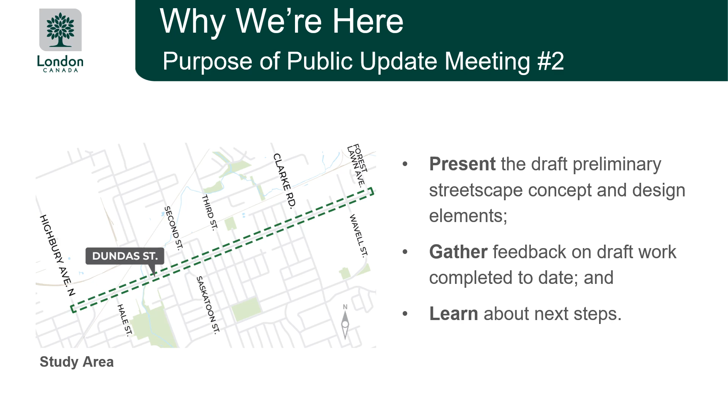Let's talk about our project timeline. We kicked off Phase 1 in August last year, with work concluding in November 2023. Right now, we're in Phase 2, which focuses on developing a draft preliminary concept and supporting design elements. The third public update meeting is set for March, where we'll present the final Streetscape Master Plan. After that, we'll work on finalizing the master plan and design guidelines, aiming to conclude by April of 2024.

On November 7th, 2023, the first public update meeting for this project took place to introduce the project and provide an opportunity to gather valuable feedback from the community, both in person and through an online questionnaire.

Feedback was gathered from one-on-one discussions, surveys, and interactive engagement activities. To gather your feedback, we organized 3 engagement activities around the room. Public input was collected at the 3 activity stations that were structured around the following themes: preliminary guiding principles, vibrant and green streetscape, and safe mobility and connectivity.

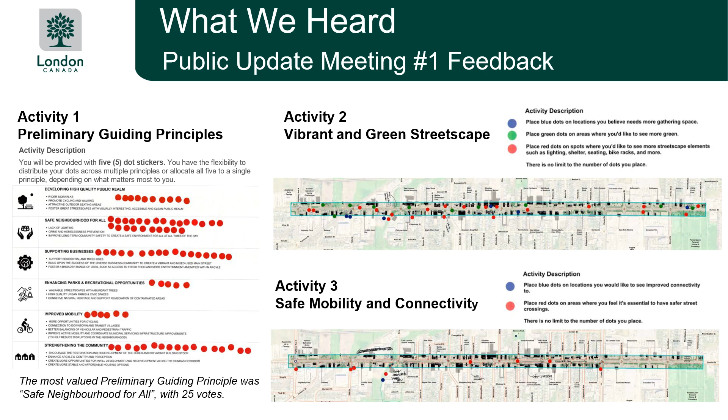Key themes that were gathered from the public's input included safety, more lighting, greening, maintenance, more pedestrian-friendly, and more incentives for businesses, to name a few.

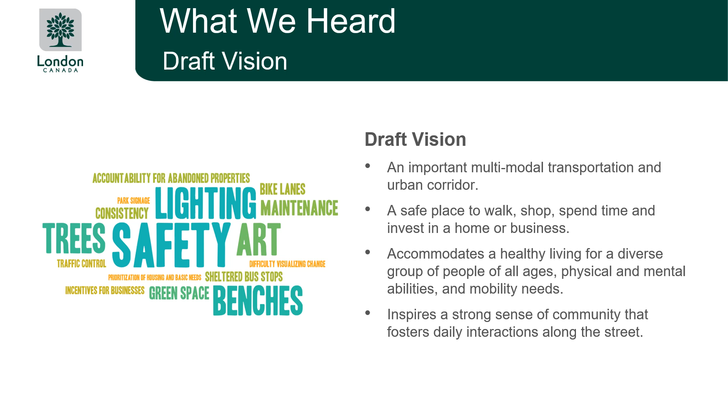These key themes were integrated into the draft vision, as shown here. This vision for the Streetscape Master Plan will guide future development within the Dundas Street corridor in the Argyle core area.

Guiding principles are the core elements that define the concepts and strategies for achieving the vision for the Streetscape Master Plan. These principles were developed based on feedback from the public consultation process and research on best practices. These principles include improving mobility, improving pedestrian realm and safety, strengthening the Argyle core community, promoting economic vitality, and improving green connections.

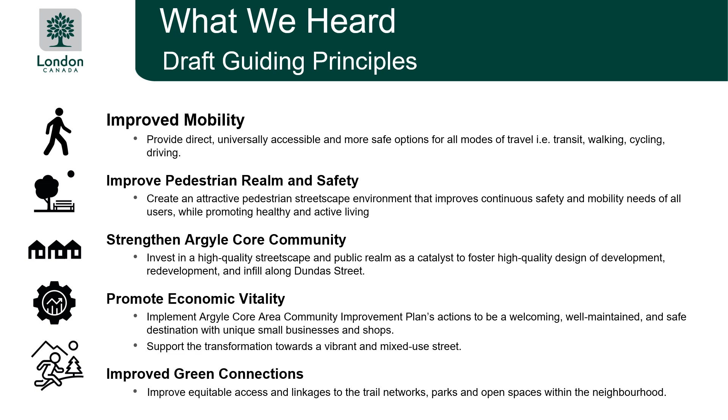When we're planning how things should function and feel in this area, we're being careful to understand the broader context and build upon what's already here. We want to make sure any changes fit well with the surroundings. And as we think about making improvements along Dundas Street, it is important to look at the short, medium, and long-term solutions reflecting the needs of the neighborhood.

As we move forward, we are gaining a clear understanding of how the streetscape operates and identifying opportunities for improvement. By understanding the broader context within the area, considering factors like zoning, setbacks, road right-of-way widths, natural heritage features, current and planned active transportation routes, traffic flow, and utilities, we can develop the streetscape design so that the public realm is a place where people will enjoy walking in, feeling safe, invited, and with enhancements that beautify the area.

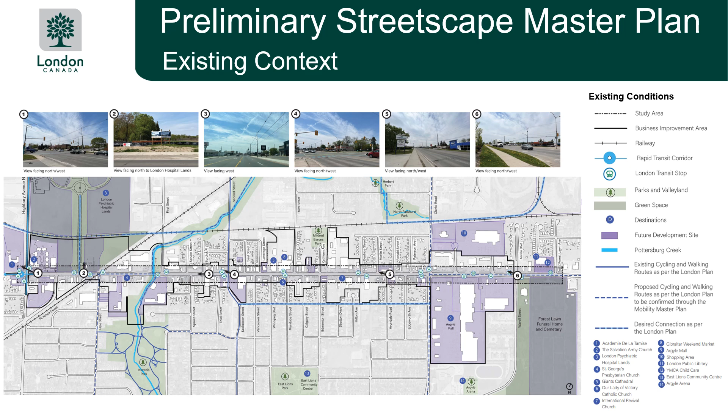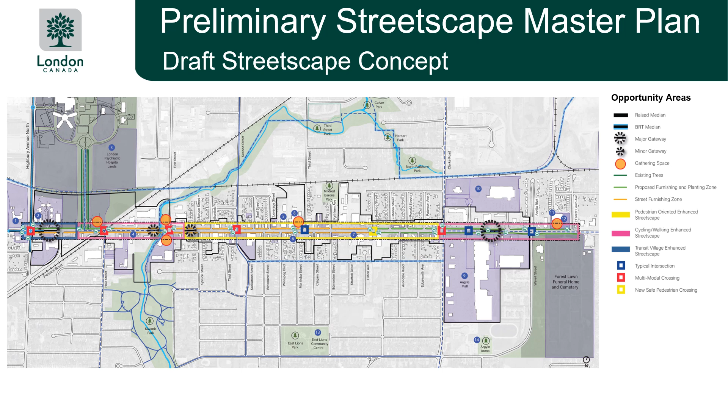These streetscape typologies and opportunity areas are illustrated in more detail in the following slides. First, we'll look at the pedestrian-oriented enhanced streetscape, which is generally applicable to the area east of the bridge at Pottersburg Creek to Clarke Road.

Concept options are illustrated in the following cross-sections A, B, and C. This corridor is generally characterized with a narrower right-of-way with zoning setbacks of around 0 meters, which means there are some limitations in implementing beautification improvements to the pedestrian space.

In this segment, our focus is on providing more safe movement of pedestrians along the streetscape. There are potential opportunities to provide beautification features in the proposed mid-block medians and where the right-of-way width increases east of Beatrice Street.

Shown here in cross-section A, the key elements of this scenario include maintaining the existing 5-lane cross-section, which includes the center 2-way left turn lane. The pedestrian realm space ranges between 2.5 and 3.5 meters, which can be characterized with a 1.8 to 2 meter wide concrete sidewalk, a 1.5 meter wide sodded boulevard or curbside furnishing zone, improved pedestrian scale lighting, and integrating standalone planters where feasible.

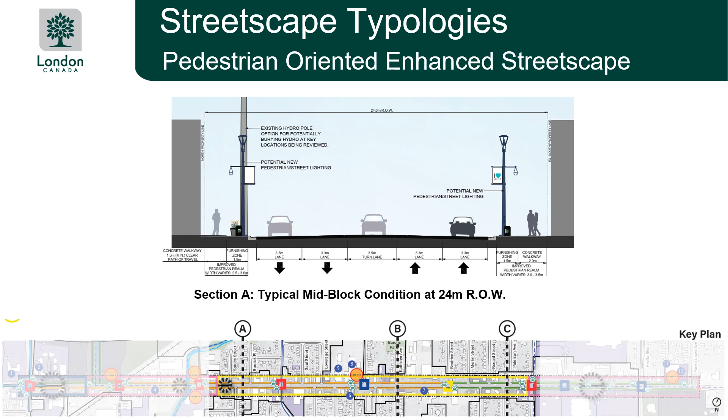The next slide, we will look at some of the advantages and disadvantages with this option of the removal of the 2-way left turn lane, which are important considerations as we further develop the Streetscape Master Plan.

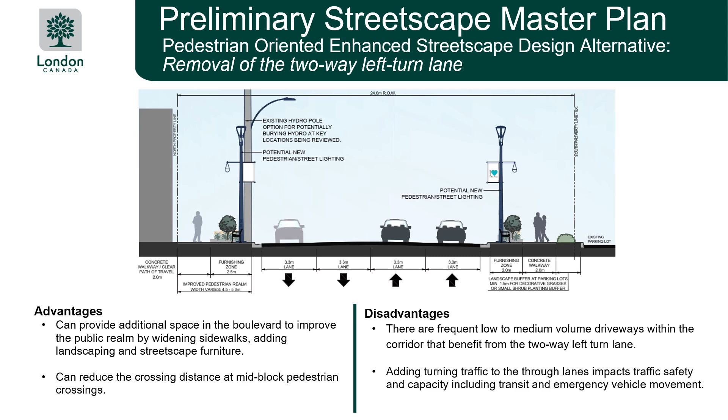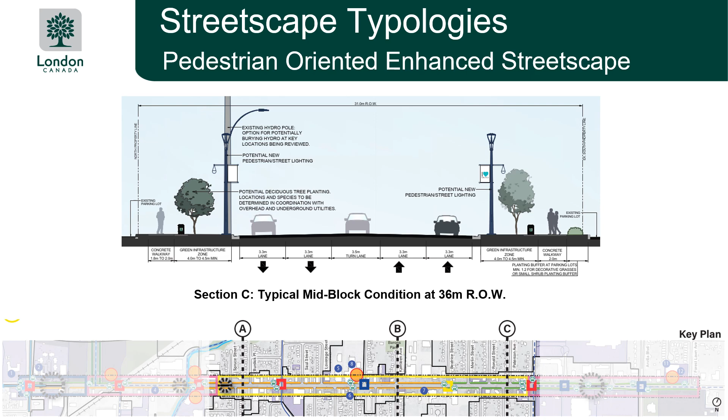The pedestrian realm on the north and south sides can be characterized with wider sidewalks and a wider green boulevard, which may include tree planting and sod, street furniture such as benches, and improved pedestrian scale lighting. Opportunities to provide a landscape buffer between the sidewalks and adjacent parking lots are also feasible in this scenario.

Next, we'll look at the Transit Village Streetscape and the Multimodal Enhanced Streetscape in the West Corridor. Concept options are illustrated in the following cross-sections D, E, F, and G for this West Corridor segment. The Transit Village Streetscape, shown here in Section D, is part of the East London Link Rapid Transit Corridor improvements. This segment also marks the entrance into the Argyle core area.

In this section, the pedestrian realm can be characterized with 2 to 2.5 meter wide sidewalks, a sodded boulevard, including streetscape furniture along the walkways such as benches, updated street lighting consistent with City of London standards, and a center raised median with an opportunity to include gateway features such as low curved planters or a unique sculptural element to mark the entrance into the Argyle core area.

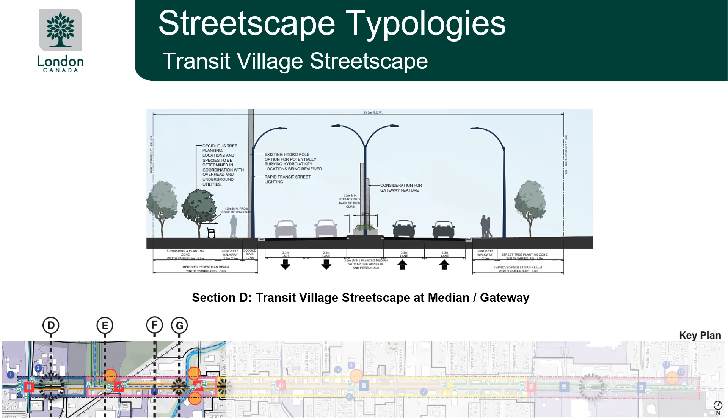Opportunities to provide new street tree planting on the south side with potential on the north side in key locations and in coordination with overhead utilities.

The multimodal enhanced streetscape options in the West Corridor are illustrated in the following cross-sections E, F, and G. This segment is characterized by the integration of the proposed cycling routes as per the London Plan, distinct placemaking elements such as gateway features, mid-block raised medians, gathering spaces or activity nodes, and improvements to the public realm where the right-of-way widths are wider.

Although there are some limitations to the segment due to a narrower right-of-way as shown in Section F, generally the key features in this segment include a separated 2-way cycle track on the south side, gateway features such as mid-block raised medians with curved planters of native grasses and perennials, wider concrete sidewalks, and wider sodded boulevards with the potential for street tree planting where space allows. Furnishing zones between the sidewalk and the roadway are also proposed in key strategic locations, which may include curbside planters, street furniture, and improved street and pedestrian lighting.

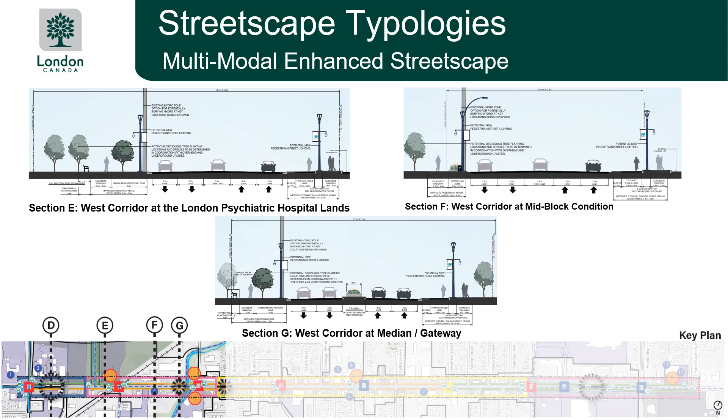The multimodal enhanced streetscape options in the East Corridor, from Clarke Road to east of the Argyle Mall, are illustrated in the following cross-sections H, I, and J. Similar to the West Corridor, this segment is also characterized by the integration of the proposed cycling routes as outlined in the London Plan, gateway features, potential for mid-block raised medians with decorative plantings, gathering spaces, and overall improvements to the public realm. This segment has a wider right-of-way ranging between 36 and 38 meters, allowing for more opportunity for multimodal travel.

Key features include a separated 2-way cycle lane on the north and south sides to facilitate safer and better movement between cycling routes and key destinations, gateway features such as mid-block raised medians with ornamental grasses and perennials, wider concrete sidewalks that range between 2 to 3 meters wide, including wider sodded boulevards with the potential for street tree planting where space allows. Furnishing zones between the sidewalk and the roadway in key strategic locations may include curbside planters with decorative grasses, perennials, street furniture, and improved street and pedestrian lighting.

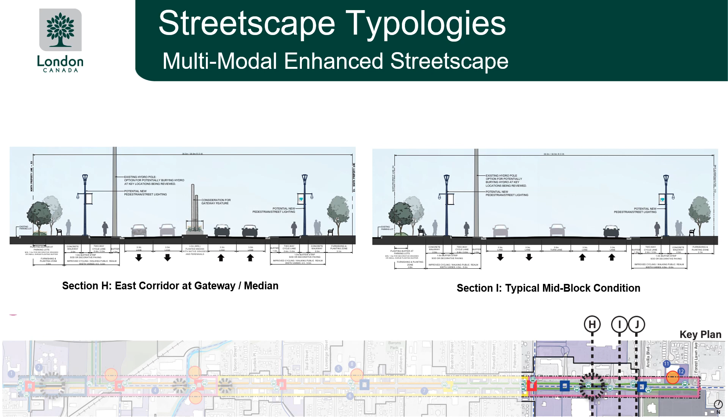The last cross-section in the multimodal enhanced streetscape, Section J, illustrates typical improvements to the public realm at or near signalized intersections. Key improvements include the 2-way cycle lanes on the north and south sides, an improved pedestrian realm that includes wider sidewalks, and a furnishing and planting zone with spaces for benches, planters, and street tree planting.

Improvements to London transit stops in key locations may include larger paved areas with additional amenities such as bus shelters, benches, waste and recycling receptacles, and street tree planting.

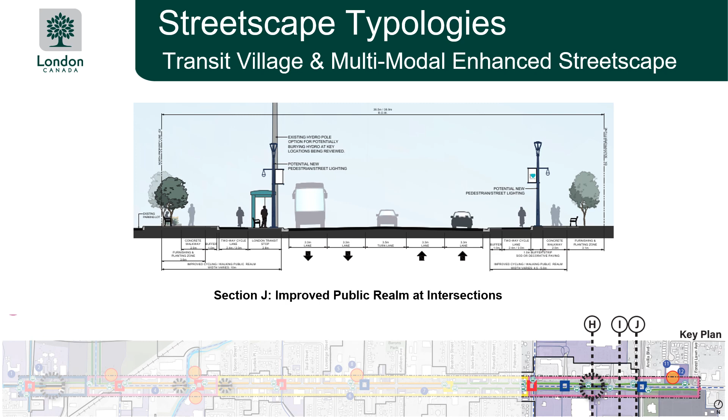Next, we'll explore special areas along the streetscape called gathering spaces or activity zones, which are illustrated by the orange circles. These are spaces within the public realm where people can rest, socialize, and participate in activities or events. They provide opportunities to connect to local open space and encourage exploration.

Gathering spaces may include new paving standards for the Argyle core area, site furnishings such as benches and bike racks, signage, shade through a shade structure or by shade trees, decorative planting, and feature lighting.

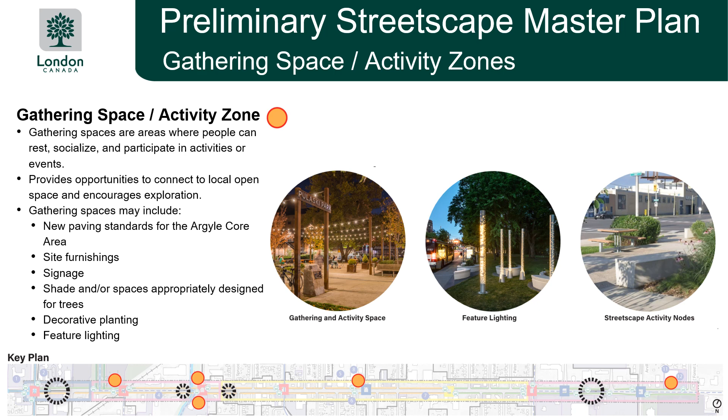The Streetscape Master Plan focus for intersection crossings is to support the improvement, aesthetics, safety, and accessibility of the public realm for the benefit of pedestrians. The next two slides will provide an overview of some of the proposed intersection and sidewalk improvements that are being explored. First, we'll look at multimodal intersection crossings, which are indicated by the red squares.

Improvements for multimodal intersections will focus on ways for all modes of traffic to cross intersections more safely. Designs can include signalized crossings, improved lighting, designated crossing markers, and covered bus shelters.

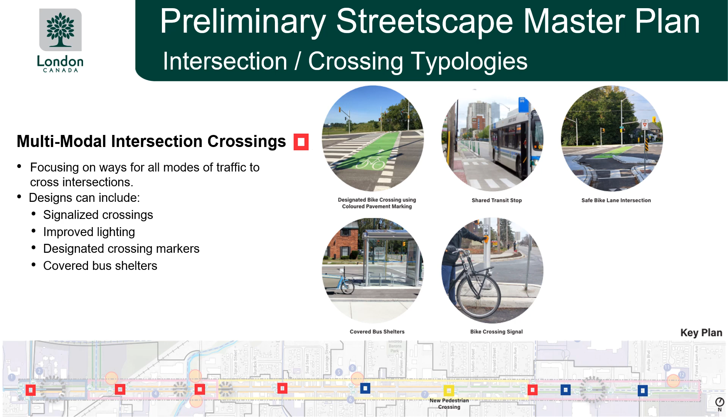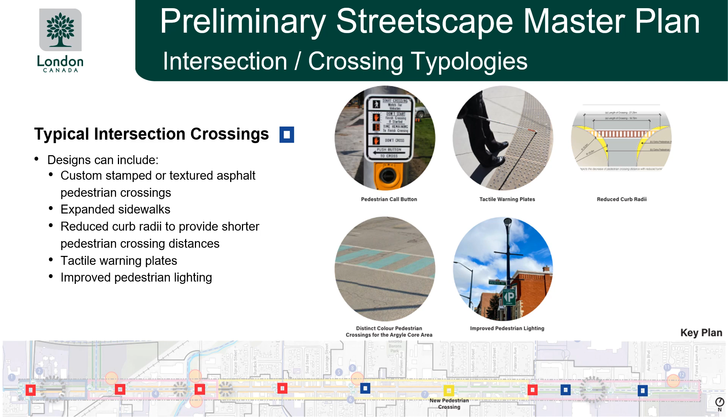On the sidewalks, a consistent strategy that prioritizes the pedestrian experience should be employed to create a higher quality public realm. City standard materials and details can be thoughtfully integrated into the streetscape design with design elements unique to the Argyle core area, such as color selections of site furniture, banner flags, and pavement patterns distinct to this area. The following two slides highlight some of the proposed improvements.

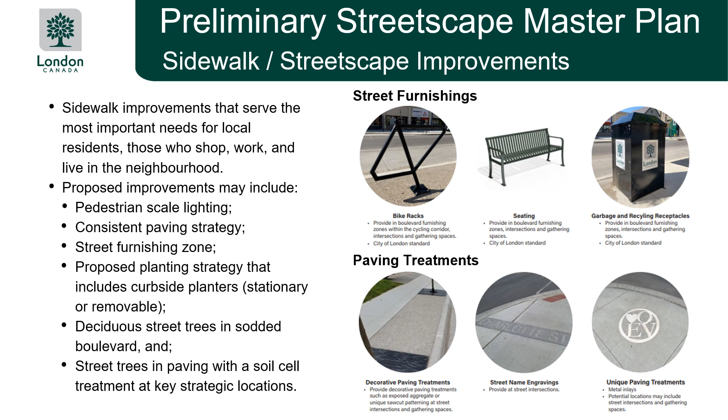New and more street furnishings such as bike racks, benches, and garbage and recycling receptacles. A consistent paving strategy along the corridor with unique elements that can be integrated at key strategic locations.

Improvements to the overall streetscape lighting, looking at potential new pedestrian scale lighting and improvements to the street lighting, improvements to transit stops including new bus shelters and shade trees, expanded paving areas for better circulation, and more amenities such as bike racks and benches.

And last, providing a comprehensive planting strategy that integrates a greening approach that acknowledges site constraints such as overhead and underground utilities, which may limit where new trees can go. So looking at planting approaches that may include curbside planters or median planters with native grasses and perennials. Street trees and sodded boulevards where space allows are also part of the overall planting strategy.

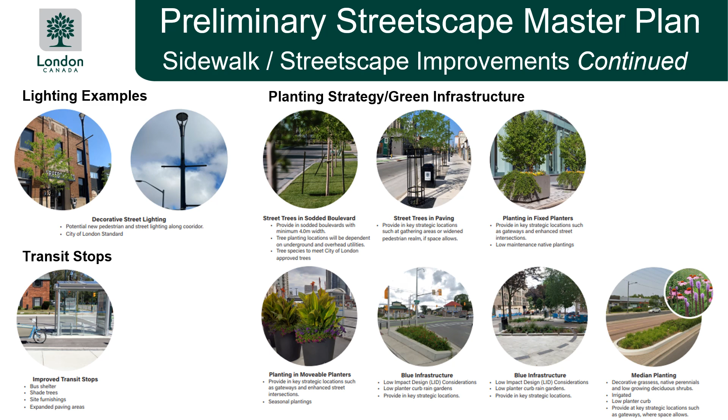Concluding our presentation of the preliminary Streetscape Master Plan, it is important to note that the timeline and opportunities to implement the recommendations from this study will be reviewed and coordinated with future infrastructure renewal and development projects. This slide highlights the upcoming infrastructure renewal projects in the area. These timelines are subject to change based on approvals.

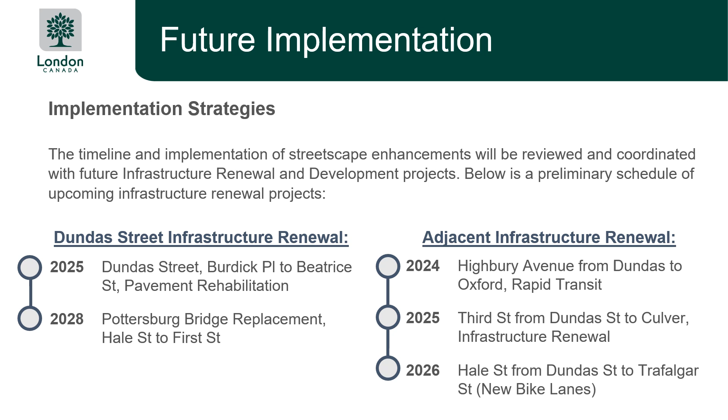Looking ahead, our focus shifts to refining the streetscape design for the future vision of the Argyle core area along Dundas Street. Your next feedback opportunity will be in March 2024 during our next public update meeting.